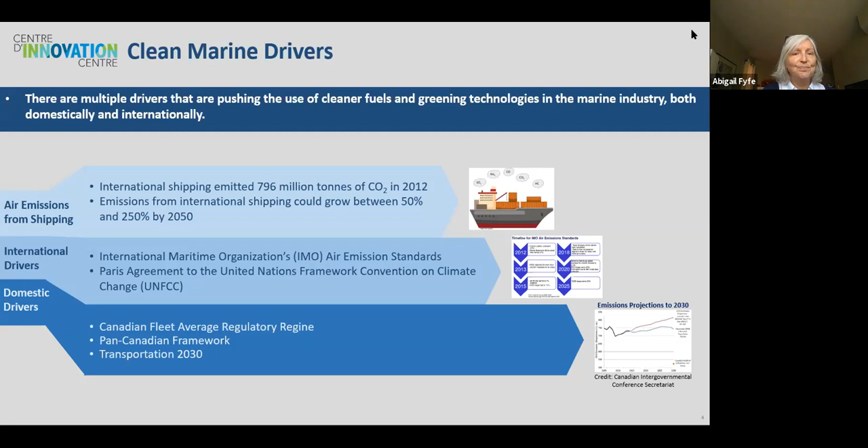The second area of our research program that I mentioned was marine mammal protection. Unlike the air emissions drivers, the drivers for our marine mammal protection goals are not associated with specific regulatory policies or international goals and regulations. With respect to physical and acoustic disturbance from ships with marine mammals, there have been no specific goals set for reduction. We're really starting on the ground floor in a way with this issue.

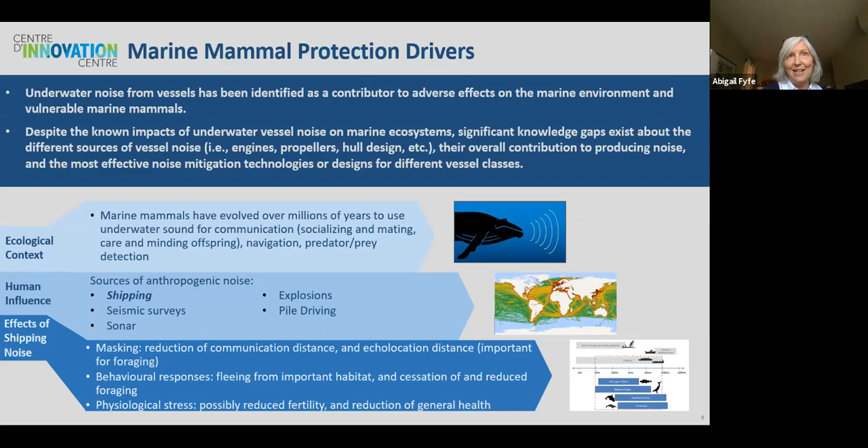Marine mammals use noise and acoustics for a lot of their key functions: socializing, mating, navigation, hunting, or finding food. Humans and ships emit quite a bit of noise into their underwater environment, and the risk is that it can mask the acoustic signals marine mammals use to survive. There are behavioral responses to underwater noise, and it can cause physiological stress on the mammals. All of these have been identified as stressors to the survival or recovery of specific at-risk species in Canada.

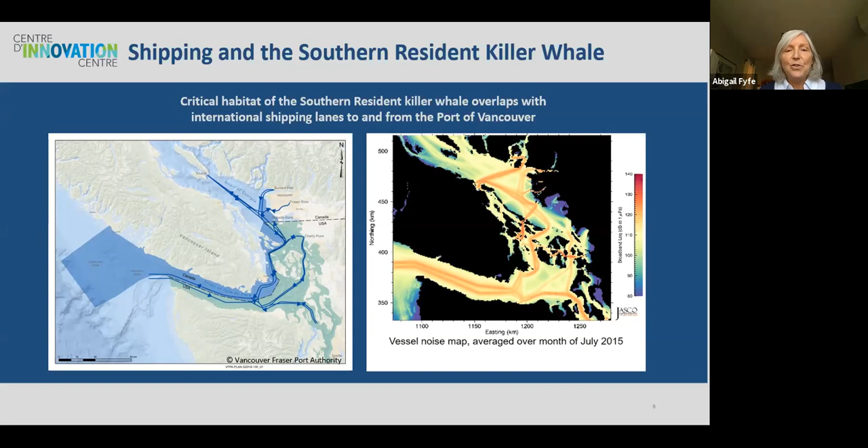With that as a background, Transport Canada has funding available to us through the Innovation Centre to support projects which will tackle those two key issues. The way we've been doing that more recently is we've initiated what's intended to be an annual request for research projects, an annual request for proposals.

This annual request is managed or run by Public Services and Procurement Canada on our behalf. It's a transparent process open to Canadian participants from Indigenous communities and broadly the marine stakeholders in the marine sector, industry, not-for-profit groups, and academia.

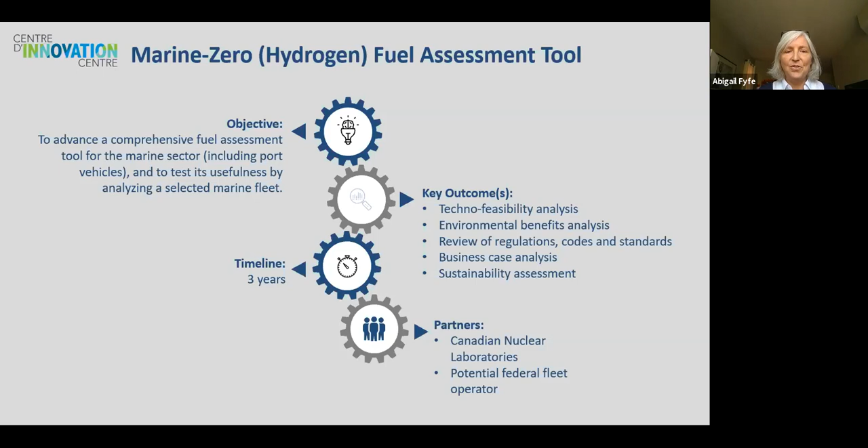Effectively, we have here a marine zero fuel assessment tool by Canadian Nuclear Laboratories. They're developing and advancing a tool to assess the use of hydrogen in the marine sector. This includes port vehicles, to assess its usefulness, cost benefits, environmental benefits, etc.

Albion Marine Solutions, one minute - Albion Marine Solutions is working on advanced air abatement technologies, a barge-based exhaust cleaning technology.

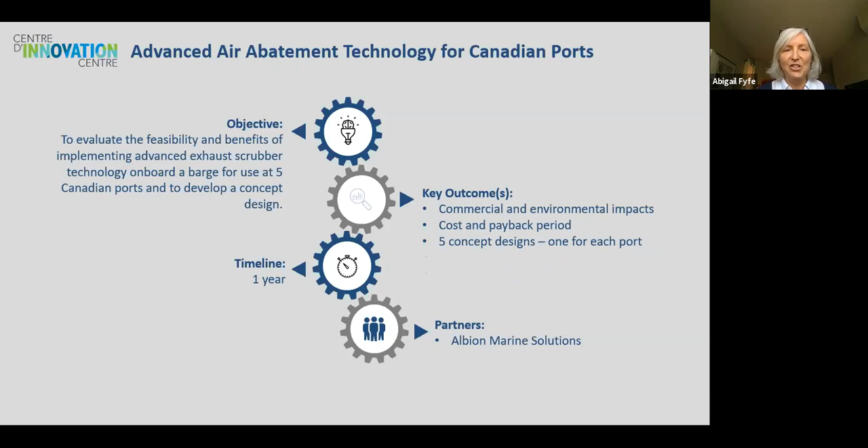Hull coating: Algoma Central Corporation is participating in full-scale trials to quantify the benefits in emissions reduction by maintaining their hull.

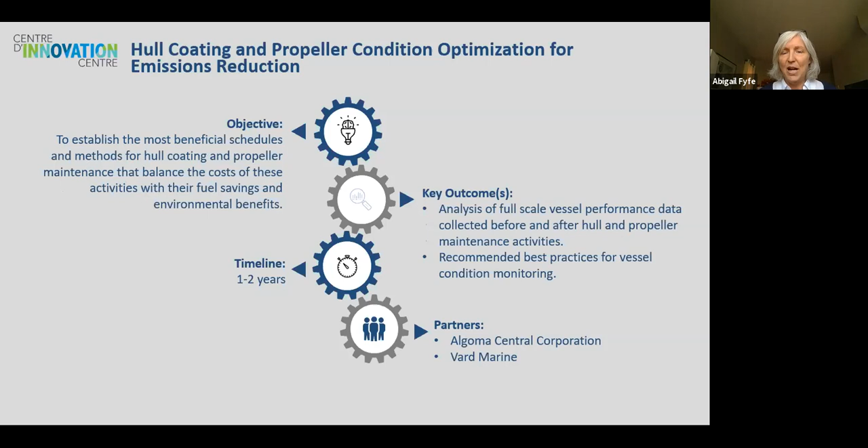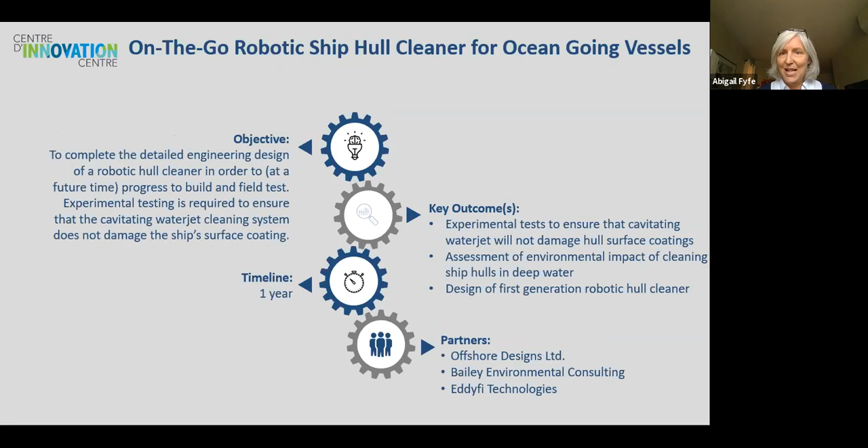We're supporting Offshore Designs Limited to develop an on-the-go robotic hull cleaner that would be tethered to the ship and is intended to clean its hull in deep water.

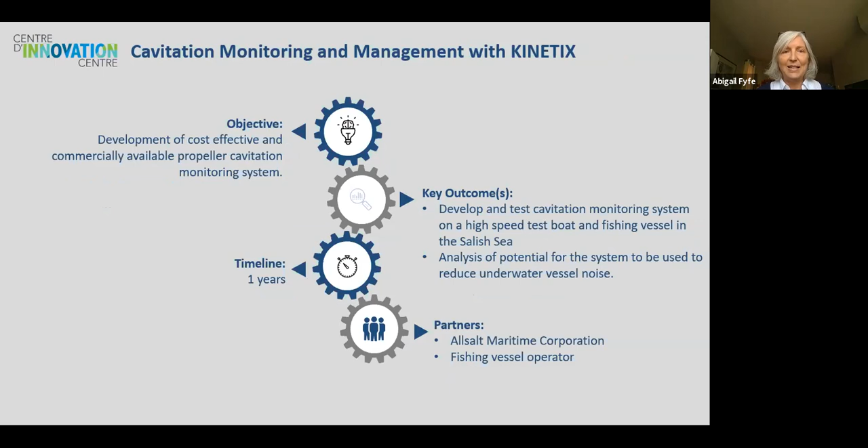Another shipboard cavitation monitoring system project, this one by JASCO. This one involves full-scale trials with Canada Steamship Lines and also includes DW Ship Consult as partners.

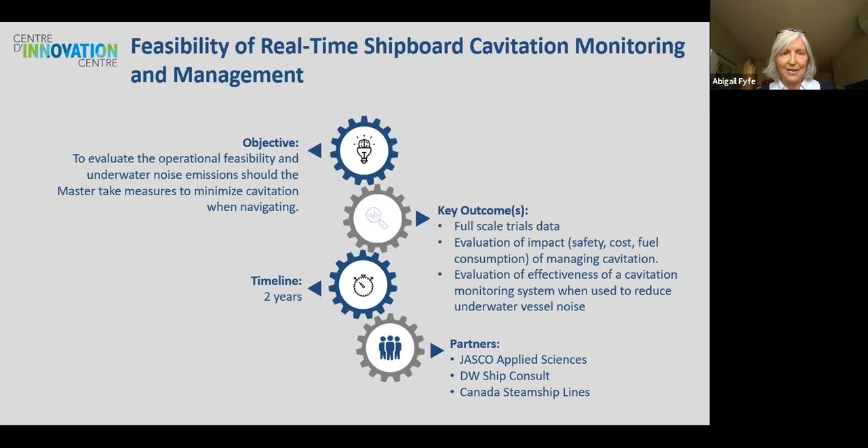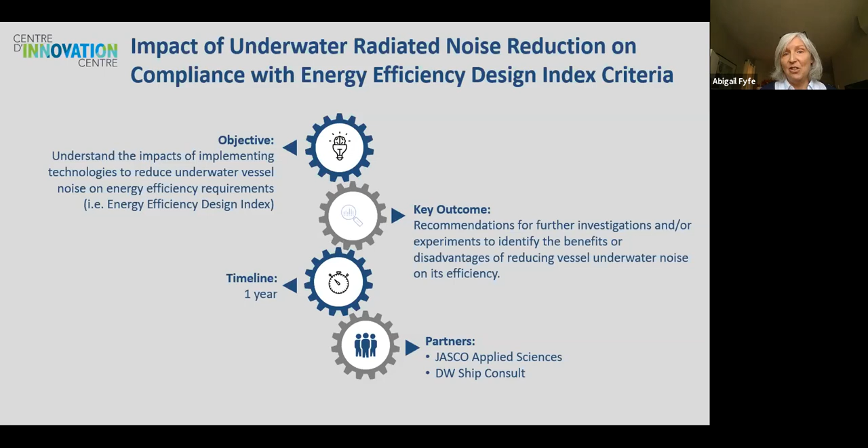The impact of underwater radiated noise reduction on compliance with energy efficiency design index criteria. That's a mouthful. This project will answer some questions about the links between energy efficiency and the mandatory IMO requirements for the EEDI, and any technical efforts to reduce noise.

This is the URN and Greenhouse Gas Reduction Program for Canada's inshore fishing craft. Graphite Innovation and Technologies, with Lloyd's Register, is going to quantify the benefits from an emissions, efficiency, and noise reduction point of view associated with applying a new graphene-based hull coating. Full-scale trials involving several fishing vessels. This is an example of one of those combined projects that I spoke about.

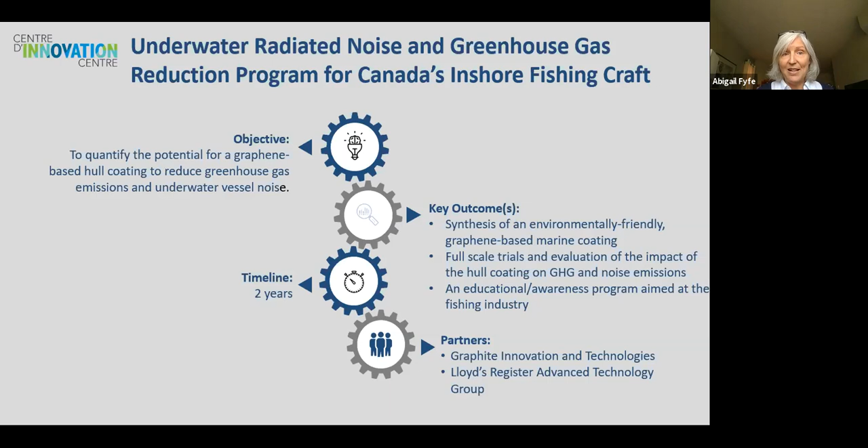So it sounds like a lot. That's 10 projects, but that's really just the tip of the iceberg. I didn't even talk about some of the innovative projects we're working on the mammal detection side, which is to mitigate physical disturbance and reduce collisions. We're supporting UNB to deploy gliders in the Gulf of St. Lawrence to detect whales or North Atlantic right whales in that area. We're also supporting projects to advance the use of infrared cameras as whale detection methods.

Our next call for proposals is expected later this winter or early next year. And just for everybody's information, we also recently announced a $2.5 million contribution program open to Indigenous communities to participate in vessel noise reduction projects. That call is open right now. And finally, the next slide is just my contact information, and I'll stop there.

Thank you very much, Abigail. This was a very clear overview of the main projects supported by Transport Canada's Innovation Centre. I know for a fact that the industry really appreciates the increased financial support for R&D in green technologies in the last few years. So we have one question from the audience.

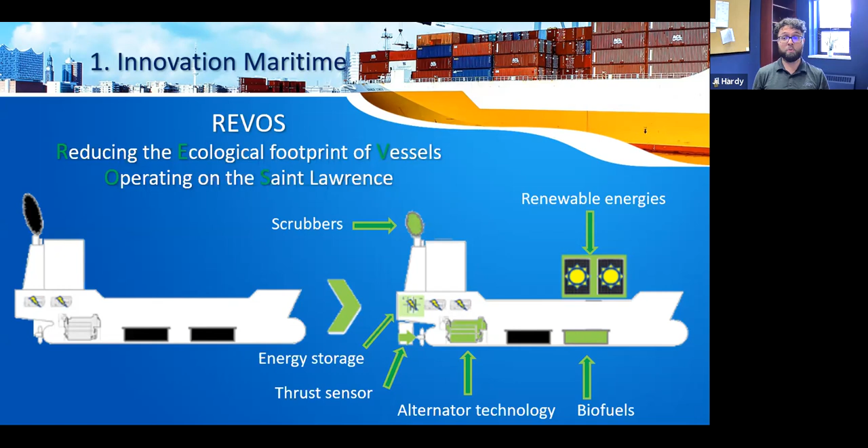A big shout out to our program partners. Without them, it would be impossible to have the leverage in order to do this research.

For the energy storage and load clipping objective, ultimately we want to find viable cases where we could use batteries aboard ship. And when I mean viable, I mean economically and ecologically as well. In order to do so, we are developing diverse simulation tools. We'll see later on why batteries are a bit of a challenge to size, and why we can't do it strictly on paper.

There are also issues with standard generators and the power management system aboard ship when using batteries, because batteries can run out of energy. So we're speaking more of an energy management system. In order to have a complete simulation of an electrical network on a ship, we need to develop a novel controller. This simulation will be validated with a scaled down marine electrical network test bench, which acts the same as a normal ship, but with much lower power.

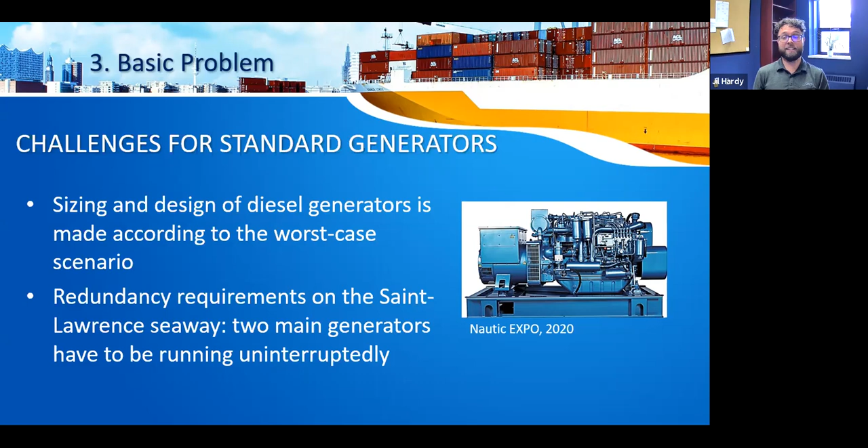Hopefully we are not always in the worst case scenario during normal operation, but this leads to underperformance issues. When we're not in our performance areas, because mainly we have low loads on the generator, there are issues with lower internal temperature, which leads to more global emissions, inefficient use of fuel, and the mechanical issues listed over here.

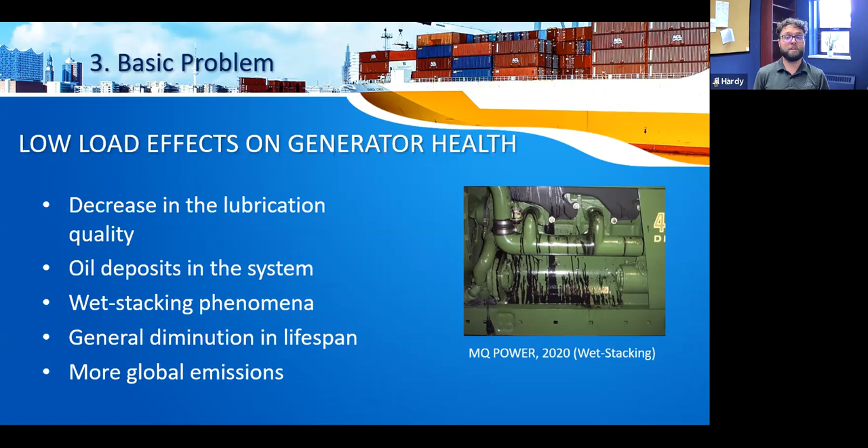The basics of batteries, it's pretty simple. You have your batteries, which are direct current, and then at the end, you have your ship electrical network, which can be alternating current or direct current. In between, you have power electronics in order to adapt the waveform and the amplitude of the voltage.

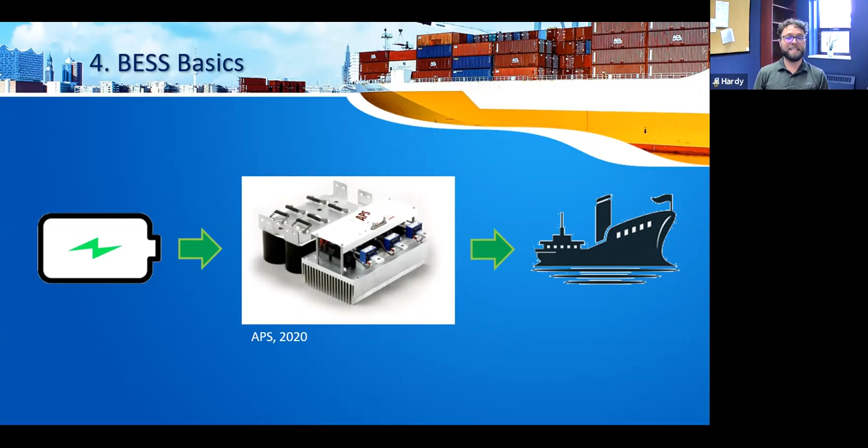Next slide, please. There are pros and cons to power electronics. They are very efficient, but we have to keep in mind, since in this presentation we're not talking about shore power, the batteries are charged with diesel generators, which leads to less emissions in operation.

Why? Well, if we have a generator which has a low load, we can use the battery to add more load to it in order to reach our performance area. If you look at the figure on the right, it's the speed characteristics of a generator when you apply a load to it and you remove it.

When we talk about generators from 1 megawatt to 1.25 megawatts, we're talking maybe about seconds in order to synchronize with the electrical network. In comparison, the power electronics, we talk about milliseconds. They are much faster and can help the health of your electrical network, which is the case for wind power plants, let's say.

They need low maintenance because it's all solid state electronics, no moving parts. They are reliable and proven in other industries, such as the mining and paper industry. And there is low mechanical vibration related to it compared to a diesel generator.

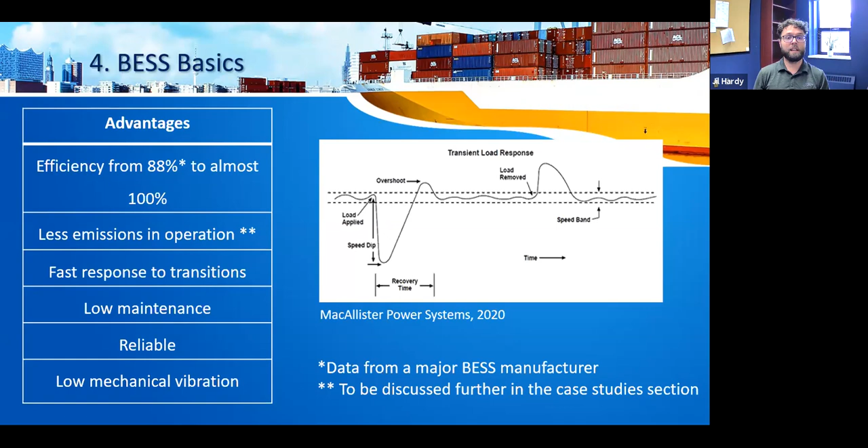Next slide, please. There are challenges, though, in order to use batteries on ships. The battery life cycle and sizing is one thing. Just having your batteries on the shelf, they are aging. And the battery packs we have right now have a 10-year lifespan, and our gensets, diesel generators, have 20 to 25 years lifespan. So we have to consider this while doing a concept.

They can be green, but it depends on how to charge them, and it depends on your diesel generator. So we have less emissions, but we still get emissions from using batteries. It's not a miracle solution. As I said earlier, you need better coordination between generation systems.

Compared to classical generation systems, they're quite costly right now because there is demand for the market, but not as much as it should be in order to reduce the prices.

There are thermal management issues. There are risks of explosion. Hence why we use battery management systems in order to have the good health signal to manage them. And the harmonic distortion is what you see on the figure on the right. Since we have power electronics, they are nonlinear systems.

What you want on your ship is the gray line. Power electronics generate the black line. And when we add them together, well, you get more voltage at your equipment terminals, which can be a problem. It can be managed, but these are design considerations.

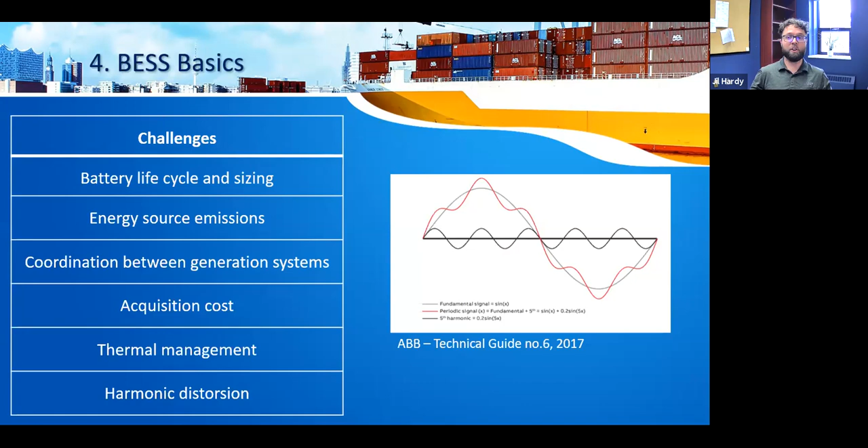Next slide, please. For the case studies, well, the biggest challenge for case studies for us right now is the data challenge. Most of the ship owners have power management systems on board, and they can gather data. But if we have the power flow, that's a good thing. But we also need to know in which scenario we are having this power flow.

Are we unloading? Are we seagoing? Are we canal going? And this is the issue right now, because in order to size a proper battery bank on a ship, we have to get very accurate data in order to do an appropriate sizing, because it's easy to just add too much batteries and have an acquisition cost which is not normal, and we can undersize, which leads to safety issues.

So we'll be looking at the preliminary results of a self-unloading bulker of one of our partners. We looked at two scenarios. We checked for a retrofit installation where we could add a small battery bank on board just for black starts and when canal going, in order to shut down the required idle generator. And we'll also look at power generation reconfiguration for new builds.

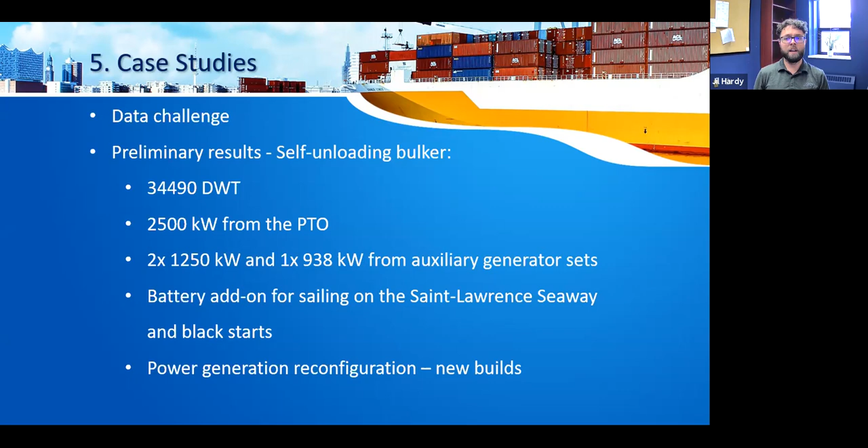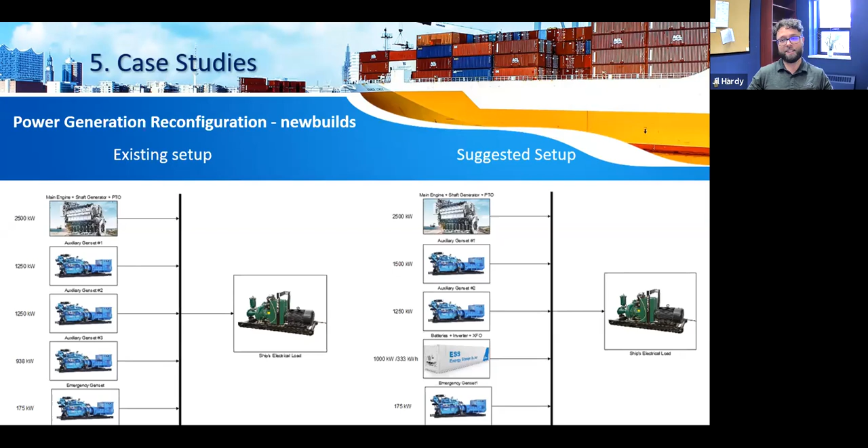Next slide, please. Which is mostly like, it's inspired from what we do with ferries, some ferries right now. So we removed one diesel generator to add the battery bank, and we oversized a little bit one, and it's an okay trade-off. Next slide, please.

So the results show that there are savings we can do with global emissions, but the payback is not that interesting right now because of the prices of diesel, generator sets, battery, and power electronics.

Hopefully, the program is 5 years and we've been 1.5 years through, so we'll find more interesting cases.

The conclusion here is that for self-unloading bulkers, adding batteries is not the miracle solution in order to meet IMO 2030 and IMO 2050. As of today, the market can move, there might be more shore power in the future, which will help with the use of batteries, but the scenarios are difficult to work, and we still need to invest.

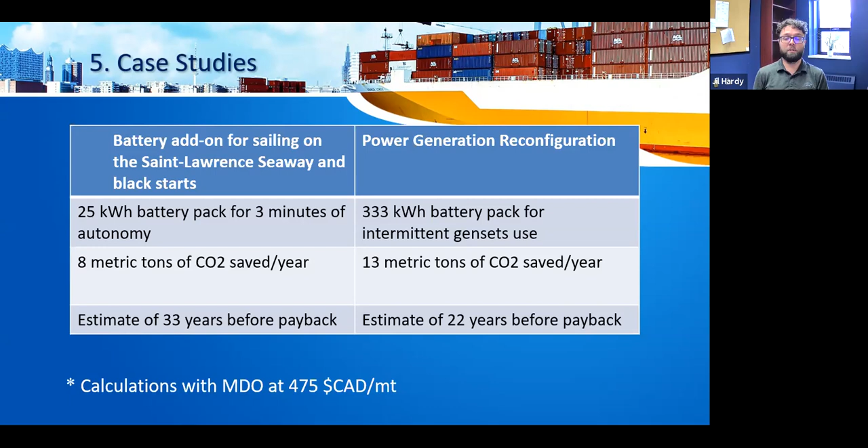So in conclusion, one of the problems we have right now with short sea shipping is the underperformance issues of the auxiliary generators. Battery and power electronics have pros and cons, and they are proven in other fields than the maritime sector. It's still new in the maritime sector, so it's a good time to look into it and build up scenarios which could be interesting.

Last but not least, refinement through completion. We have preliminary results, and I hope that in 3.5 years I'll have a solid case to present to you and show you how batteries will be interesting for the market. But right now we can't say so, it's a work in progress. So thank you for having me, and I hope you learned a thing or two about batteries on short sea shipping today.

Thank you very much, Jil, for sharing your project, your progress on this research. It's interesting to see that you're working with 3 Green Marine certified companies on the St. Lawrence River, very different types of companies from bulk carriers to ferries and tugs. So I can imagine that the challenges must be very different from one type of vessel to the other.

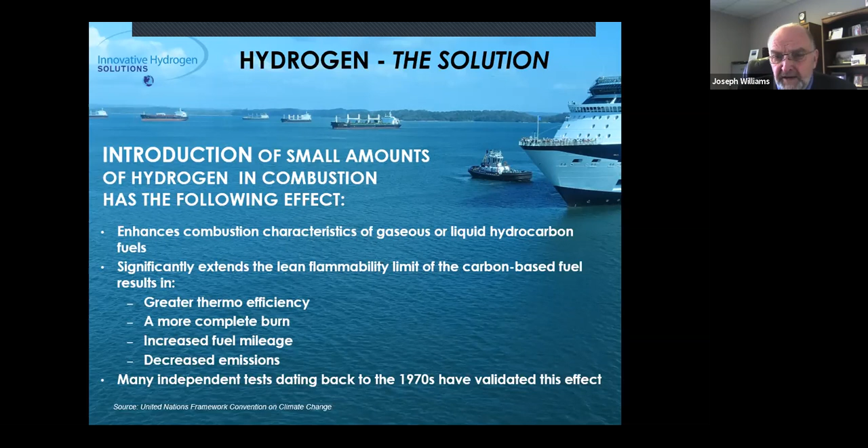The question, however, and it remains today the question, is how do we deliver this hydrogen in a safe, efficient, and reliable manner? Reliable being the key word.

So what I wanted to talk about was the evolution of hydrogen on demand with third-party validations and verifications. I'm going to go through a sequence of tests that have been done in the past 46 years to bring us up to where we are today.

It started back in '74 at the Jet Propulsion Lab with Houseman and some other individuals who did on-road studies with fragmental amounts of hydrogen and oxygen gases that we presently use. That's how we end up getting the name of our technology, which we call IFHI - innovative fragmental hydrogen injection. It's an engineering term, not really a marketing term, but other things like iPhones and iPads, they seem to have done okay, so we feel pretty comfortable.

In the early 80s, I met a professor of dynamics and a Canadian inventor, George Vosper, from Queen's University. He really taught me an awful lot because I knew absolutely nothing and was dangerous at that time, about what a small amount of hydrogen would do when you add it to the intake of a gasoline engine. It burns 9 times faster than gas, 14 times faster than diesel.

In 1995, further studies done at the University of Birmingham just wanted to show this is a global technology that's been tested and validated everywhere throughout the planet.

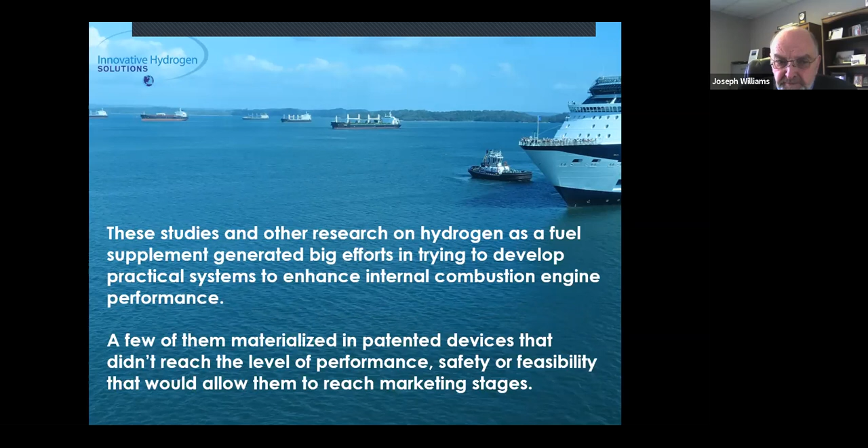So these studies and the other research done on hydrogen, they called it a supplemental fuel, but it's not really a supplemental fuel or an alternative fuel - it's fractional amounts of hydrogen. A lot of these devices never were commercialized because of reliability issues.

There are places like the Arizona Department of Environmental Quality, California Environmental Engineering. I was actually involved in the 2004 test that they did, and they did one in 1994. The result gave a Canadian company ETV verification, by the way, and they felt that this result really verified that this technology is viable for reducing emissions and fuel consumption in large diesel engines.

The American Hydrogen Association again did testing. Corrections Canada did testing. Testing was done at the Bowden Penitentiary with Ernie Hughes when he was the head of Corrections Canada, and they got fabulous results to the point where they were granted the CSE Environmental Award back in 1998, I believe.

So as a result of what happened at Bowden, you had the Northern Alberta Institute of Technology testing on a Ford Crown Victoria, and the University of Alberta finished accredited courses outlining testing methodology specific to hydrogen enhancement. Queen's University got on board with research in hydrogen fuel combustion when we retained Wardrop Engineering to help us design, develop, and crystallize an onboard generator of hydrogen and oxygen gases that would be reliable, user-friendly, and work in four seasons. Queen's helped us quite a bit there.

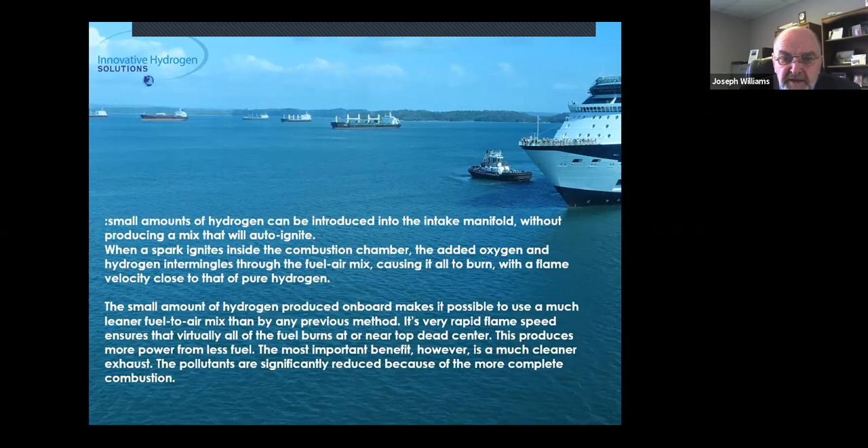So this is explaining what those studies did. The goal of the study was to observe the impact of hydrogen injection on engine performance and emissions. Because you'll be getting a PDF of this file, you can read some of the numbers you'll see in the different tests that were done, which are very similar by application, so we won't get into detail with them for the shortness of this presentation.

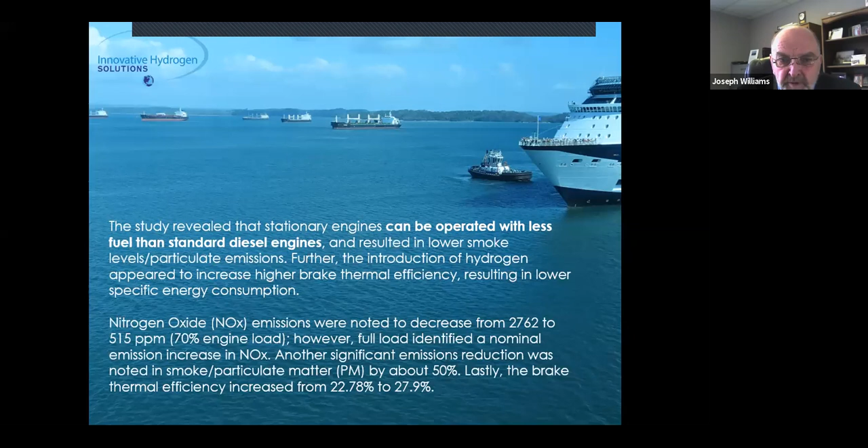And again, this is a study that was done in 2012 in India. It's a really good study, worth taking a look at to show what fractional amounts of hydrogen will do again.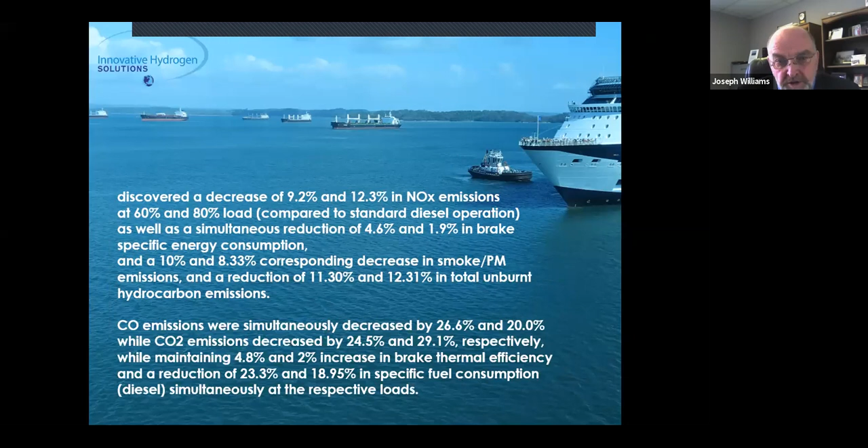And then this is another test that has all the different numbers, which are very reflective of what our results are in the studies we did with the I-PHI technology. So the conclusion of all of these studies, not just both, is that the use of hydrogen enriched fuel introduced in a diesel engine produced less pollution and better overall performance in diesel compression ignition engines.

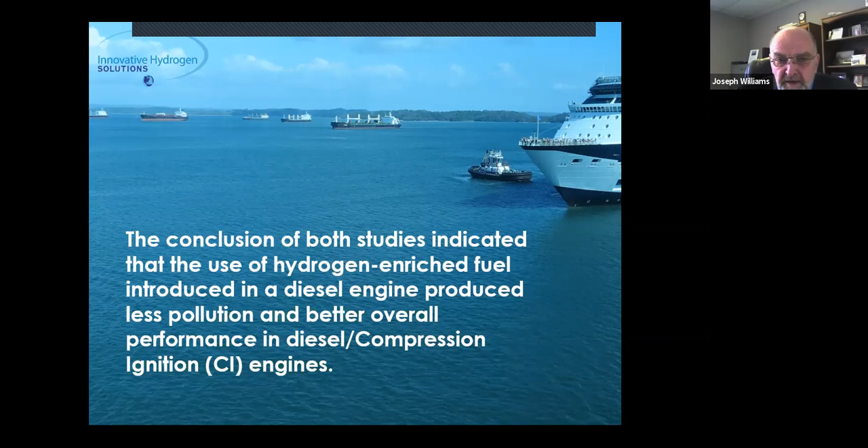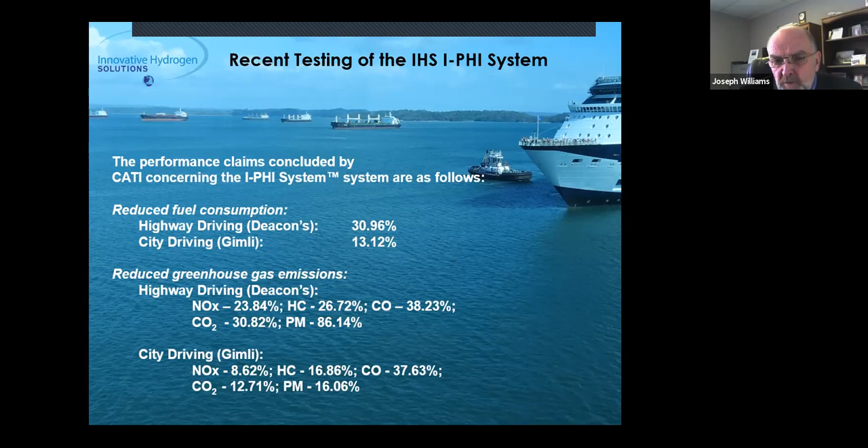So the I-PHI system, when we did our first study with Clean Air Technologies, CATI, we did an on-road study and showed a 30.9% reduction with a highway rig and a controlled test, and in city driving, a different application, 13%. This is with transportation - we'll get into marine shortly. And we reduced greenhouse gas emissions significantly. Of note, particulate matter down 86%, and NOx almost 24%. These studies are very similar to other studies we've done and are really, really important when we talk about what's going on in the world today with COVID-19, which I'll get into in the last slide.

So the CATI people conducted extensive on-road tests with Wardrop Engineering showing what our technology will do, as well as testing with West Virginia, Pennsylvania Transportation Institute, North Carolina State University, and CARB. They do a lot of work with CARB now under the name of 3DATX Corporation.

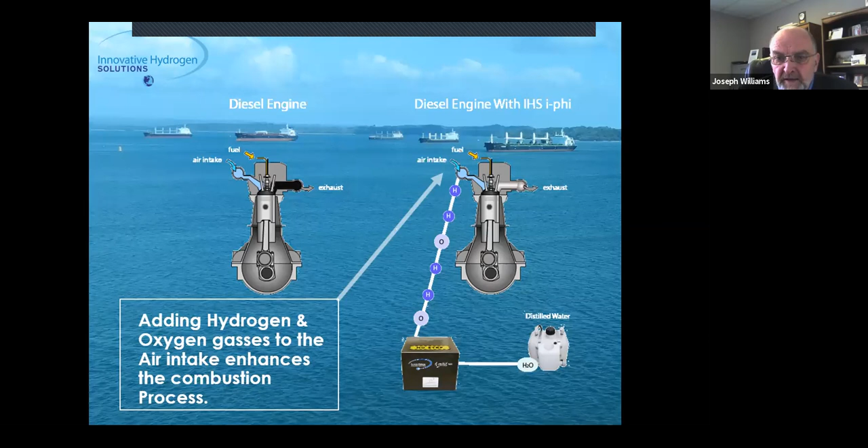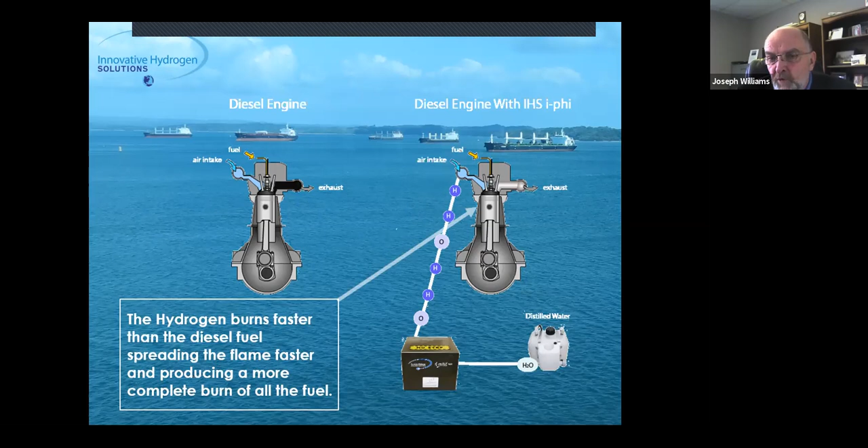So what we're doing here is adding hydrogen and oxygen gases to the air intake of any internal combustion engine, in fragmental amounts, about 1%. It burns faster, spreading the flame faster and producing a more complete burn of the fuel in the combustion chamber. Burning more fuel increases the distance we're going to travel because we're burning the unburned hydrocarbons.

We're burning the waste. We're burning more fuel. It results in less soot and other pollutants. Soot is the number one killer to the transport industry.

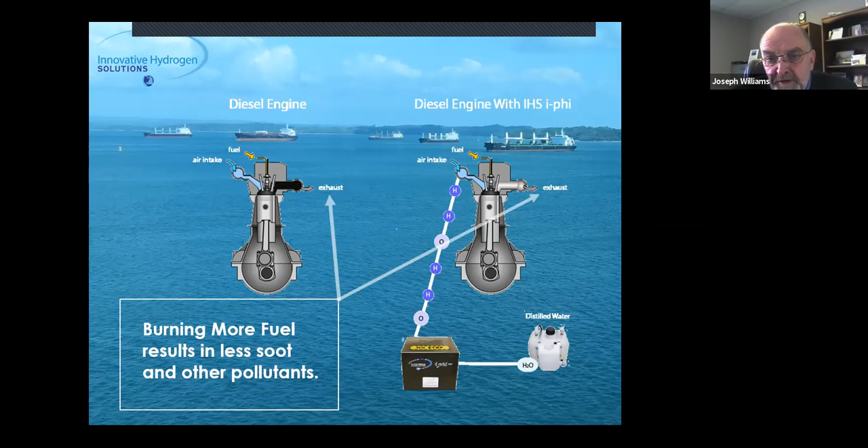It's also a huge issue with the U.S. Navy, who we're working with Fairbanks Morse right now. And that's one of the big benefits they see: it'll reduce the amount of maintenance required on their engines

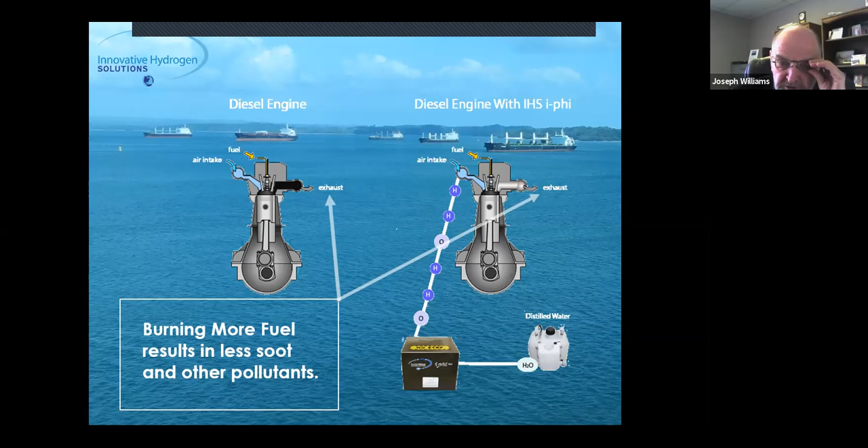by getting rid of that soot buildup. Less soot extends the life of the EGR valves and decreases maintenance costs in the transport sector, and now in other industries that are required to have DPFs and EGRs and whatnot.

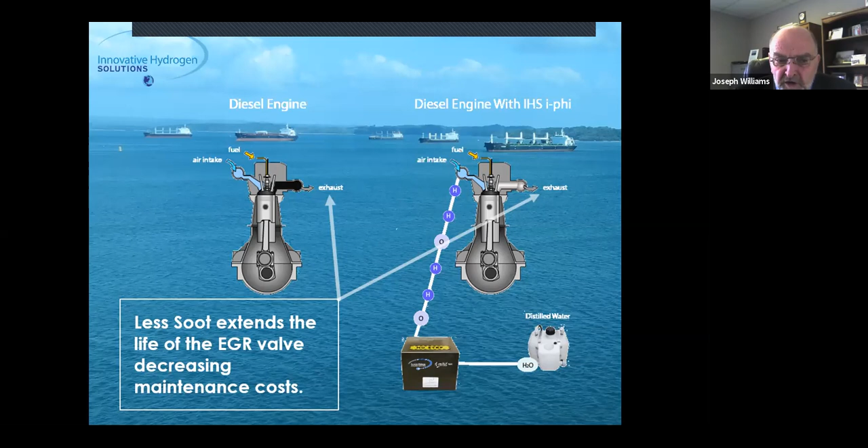We reduce and push out the frequency of diesel particulate filter service, saving time and money. Winnipeg Transit, Halifax Transit, most transit authorities in Canada and the United States are spending $18,000 to $22,000 per event every time they have to do something with that diesel particulate filter. It's the nightmare of all nightmares for trucking companies.

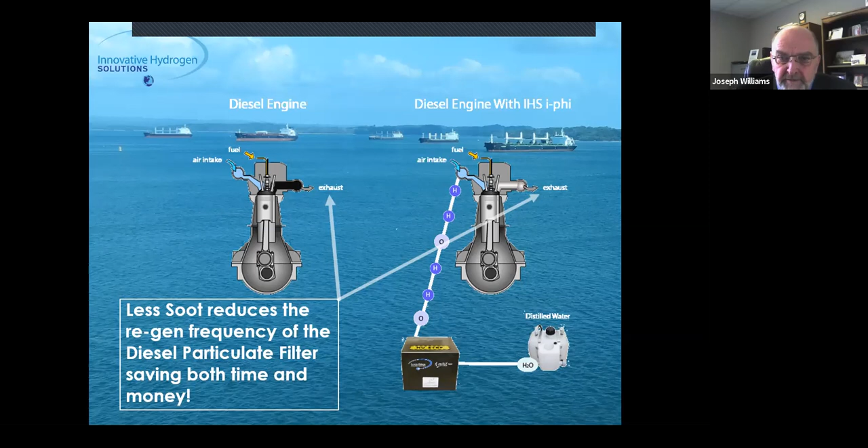So the marine industry accounts for about 3% of total GHGs. You've got the 2020 IMO regulations in place. We've done limited testing, but on propane, gasoline, and diesel, we brought SO2 levels down to 0 parts per million. Increasing emission regulations reduce the profitability that everybody listening to this knows.

In an already low margin, high saturation industry, it's becoming very costly. And one hydrogen fuel injection company is positioned for the future. We have a full ISO 14064 Part 2 carbon plan and green print assessment that was performed by Jomini Environmental. It's a cradle to grave analysis of the impact of our technology.

We want to make sure we can manage it. If you can't measure, you can't manage. So we can manage and measure the carbon offset reductions, so we can monetize the carbon credits.

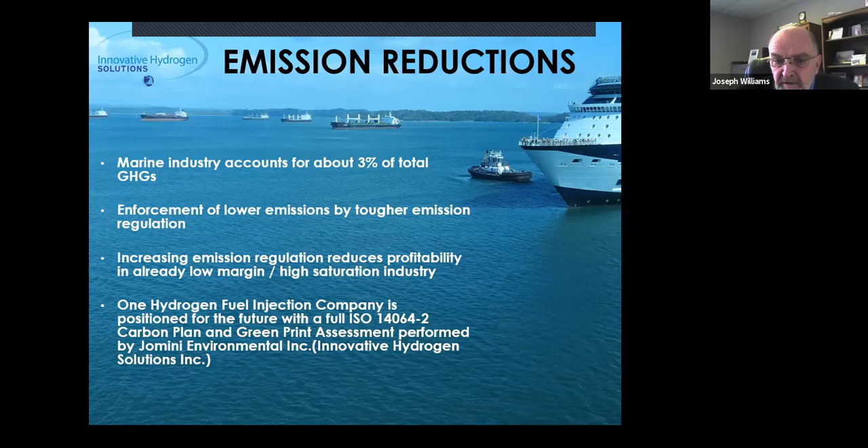So in genset operations, in the marine market we got into with the Danish Marine Authority, we saved. Caterpillar did the fuel testing. They validated a 26% reduction at 1,800 RPMs.

We reduced the maintenance cost. We extend the engine life. The ROI on this, when we talk about ROIs, is less than a year on transportation, on gensets, and on marine. We provide carbon offsets. We create a better working environment.

So we've completed our GPA. We signed a 5-year agreement with Fairbanks Morse that ends in November. We just got a letter from them yesterday. We're renewing that because the Pentagon reached out to Fairbanks and wants us to work on the third contract

that we've already won 2 U.S. military contracts with. Lloyd's approval for testing with the Danish Marine Authority, and the Lloyd's group are also going to work with us with the US Navy when we do the deployment on the third US contract.

So this is just the slide showing the Caterpillar results with the different fuel results. You'll be able to take a look at this in the PowerPoint.

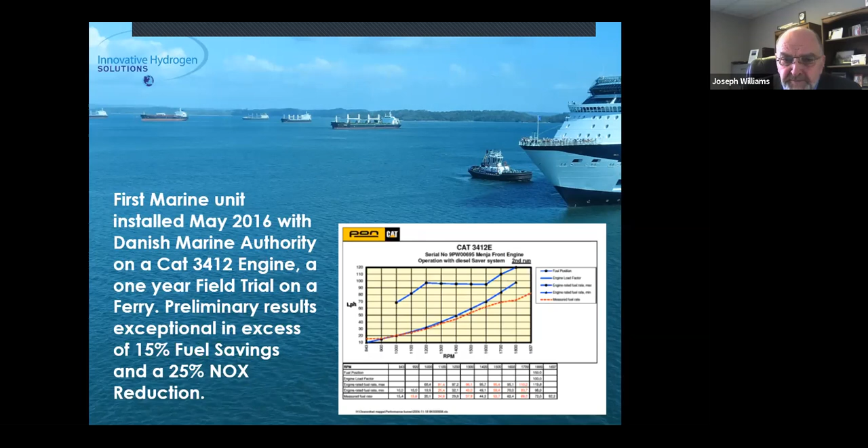So we were able to go to Augsburg, Germany at the MAN engine facility. We did modeling on the 48/60 engine with the US Navy and Fairbanks Morse using 1% hydrogen. We did 3 and 5. Once we did 3 and 5, actually results got worse. 1% was the sweet spot.

No changes to the air fuel ratio. Increases in heat rejection were negligible. So we were not going to void the warranty on a $30 million engine.

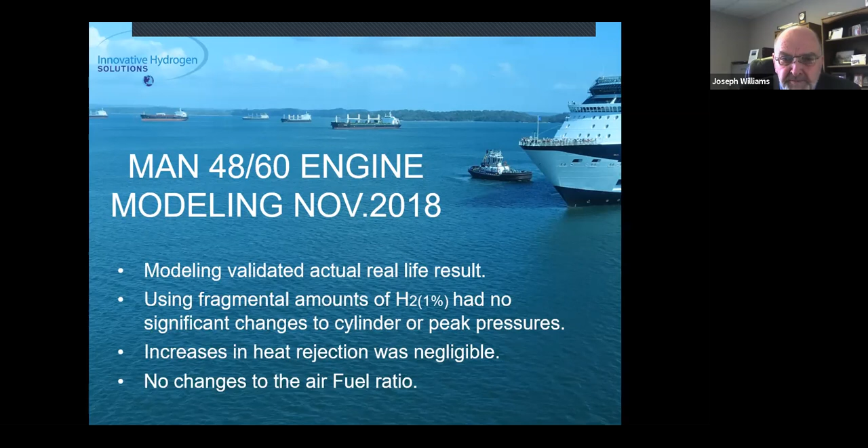Hydrogen is often presented as a potential replacement to fossil fuels, but I didn't know it could be used in combination with current fuels and still deliver interesting emissions reduction. So I think that's definitely interesting as a transition measure. Do you feel that things are finally looking up for hydrogen in the marine industry? Are there still major obstacles? What is required to encourage more ship owners to initiate pilot projects?

Well, that's a really good question. We had a rough time with COVID, as everybody did. However, the US Navy reached out to us and Fairbanks Morse 1 month ago and want to incorporate our transitional hydrogen technology into their 20-year hydrogen plan, because they really believe their future for fuel with their ships is hydrogen. And so it's not ready yet.

You have to applaud all the hydrogen companies, the Ballards of the world and others. There's still issues with infrastructure and what have you. That's why we can help make what they're doing a reality by working with diesel fuel and liquid natural gas. We can reduce the methane slip that happens with liquid natural gas, which is a big problem.